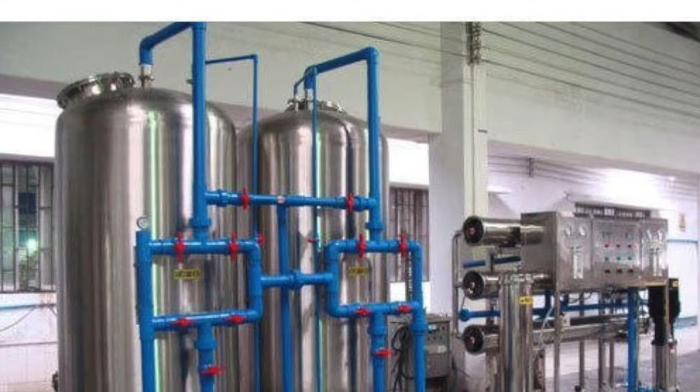Water purification is the process of removing undesirable chemicals, biological contaminants, suspended solids and gases from water. The goal is to produce water fit for a specific purpose. Most water is disinfected for human consumption, but water purification may also be designed for a variety of other purposes, including fulfilling the requirements of medical, pharmacological, chemical, and industrial applications.

The methods used include physical processes such as filtration, sedimentation, and distillation; biological processes such as slow sand filters or biologically active carbon; chemical processes such as flocculation and chlorination; and the use of electromagnetic radiation such as ultraviolet light.

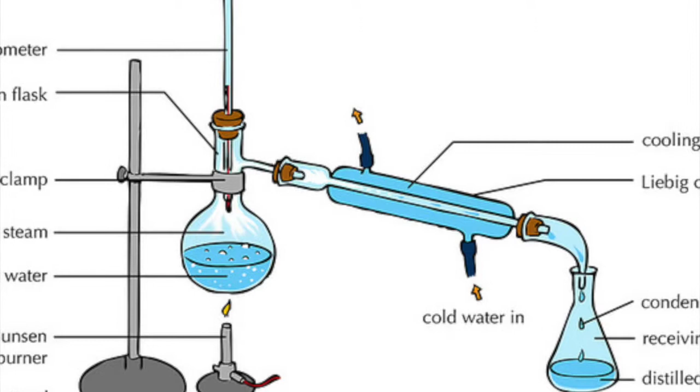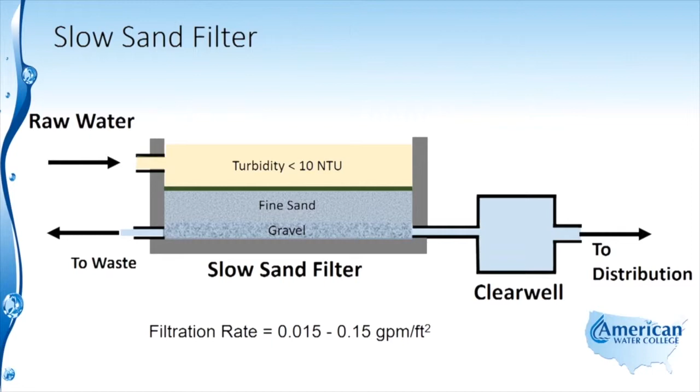So for a slow sand filter, as its name indicates, the filtration rate is very low. It's in the range of 0.015 to 0.15 gallons per minute per square foot of filter surface area. So it's got a very, very low flow rate in relation to the surface area of the filter, and that's why it's called a slow sand filter.

You're so cool, man.

We will listen to another attitude on this problem. Hello, Professor Gan. Hello. Talking about this problem. Okay, this problem. One of the causes of the problem comes from plastic waste that is released into the sea. Around 80% of the plastic in the ocean comes from activity and industry on land.

This can include everything from car tires, technical sport equipment, and fleece clothing to cigarette butts and cotton buds. Everyone can and should contribute to this solution. Always pick up any garbage you find along your way. This solution solves the problem's cause; it's a long-term fix. In other words, this solution is increasing responsibility.